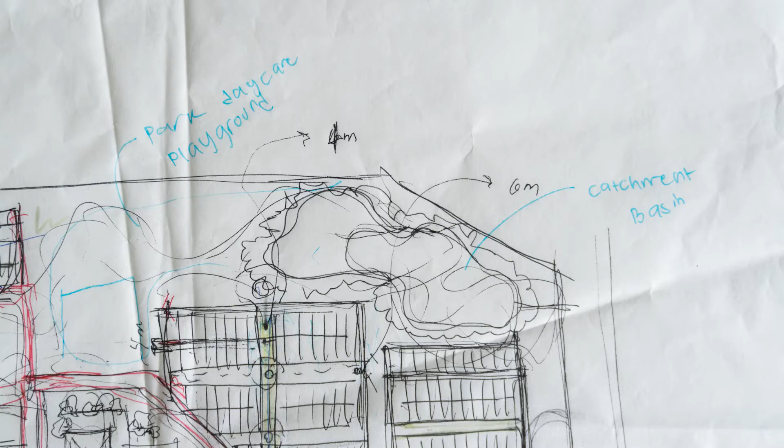Hi guys, I'm Alexa and right now we're about to start a meeting with the Vice Mayor of Siargao, Vice Mayor J.R. Coro, and his team for us to present what Anne and Wendell have actually produced for the relocation sites in Siargao Island.

Hi Vice Mayor! Hello, good morning. Sorry for being late. No worries, no problem. Yeah, we were corrected also - it should not be relocation, should be resettlement. You cannot force people to move, it has to be voluntary. We'll be very conscious of the word relocation and we'll make it resettlement.

Out of curiosity, Vice Mayor, where are the families right now? They're in coastal areas mostly, and the DENR placed structures that mention no-build zones based on standards of the E-NIPAS Act of 2018. So right now they're all temporarily located in various areas. There might be changes in the land size, madam, because they're conducting a biodiversity assessment.

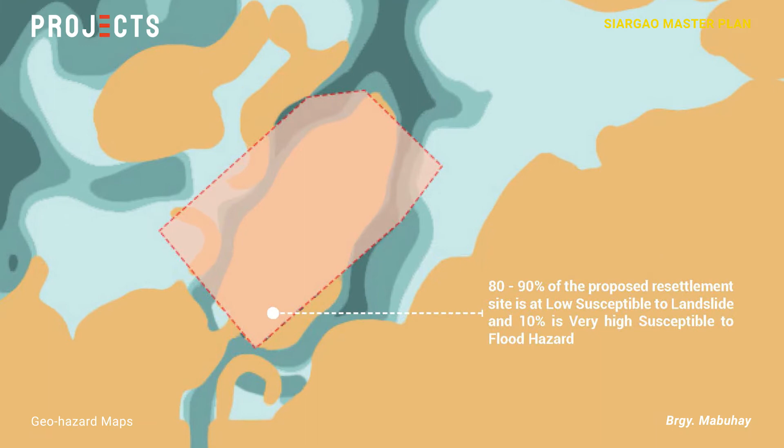We wanted to cluster different groups of families together so that they also have access to amenities at equal distances. We didn't want someone to be too far to a certain amenity, which is why the multi-purpose hall is central to everybody. Then we allotted open spaces and general landscapes all throughout.

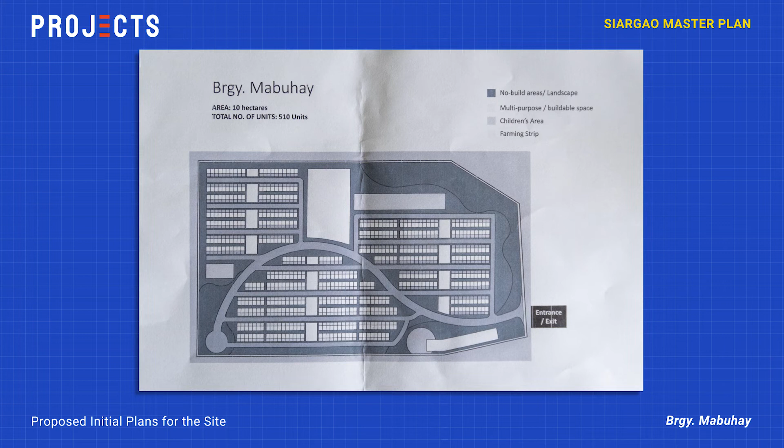And then we noticed there's a 2-meter easement on each back end of each lot. So instead, these families can actually share these as shared garden spaces for gardening, for farming, so that it will also help them with their food.

And so we have one major road, which is 10 meters wide, and we made sure to minimize it so that we could just focus on open spaces. Really well-designed open spaces and amenities and children's designated zones for children is something we really gave importance to, so that they could also enjoy living or engaging in their own personal activities and lifestyles.

So the window design is heavily inspired by the culture and lifestyle of Siargao, and the window design wants to represent what Siargao is - having the perfect wave, having a teardrop-shaped island, being known as the surfing capital of the Philippines, and being abundant in coconut trees.

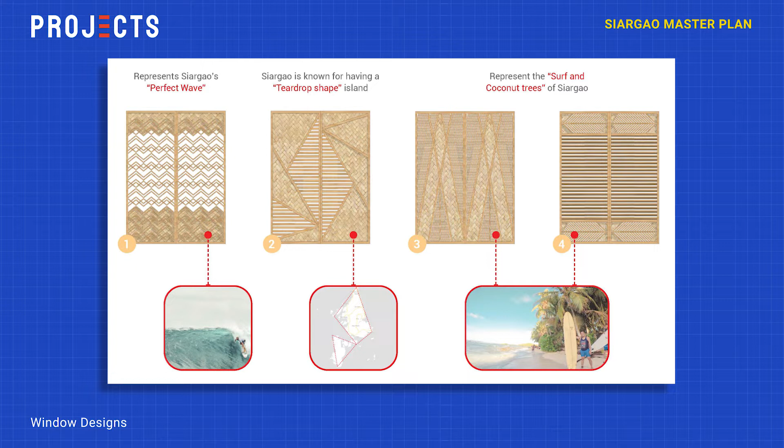For the designs, only one will be chosen by the user. Actually, I know speed is also an issue, so we tried to make it look as beautiful as we can for everybody. But if you do want a plain design, that's also okay. If you do want to pick any of the designs, we will make plans for these so that it could be easily replicated or done on site.

Maybe in the future when there's more time and budget, they can engage in rainwater catchment. You can incorporate that because that's really a must - one of the things we normally do. Like for example, in the island communities we have, prior to the typhoon, everybody had its own rain catchment.

Secondly, under the building code of protected landscapes and seascapes, you're required to have your own rain catchment. Because our water source is very scarce, and since we're type 2 weather, we have rain the whole year. That becomes your primary drinking water source. Sorry.

Okay, so we just ended our meeting with the local government of Del Carmen, Siargao. Anne and Wendell presented their plans and ideas for the resettlement sites, and I think it was well received because the mayor and the vice mayor seem to have liked it and are looking forward to building the first prototype house.

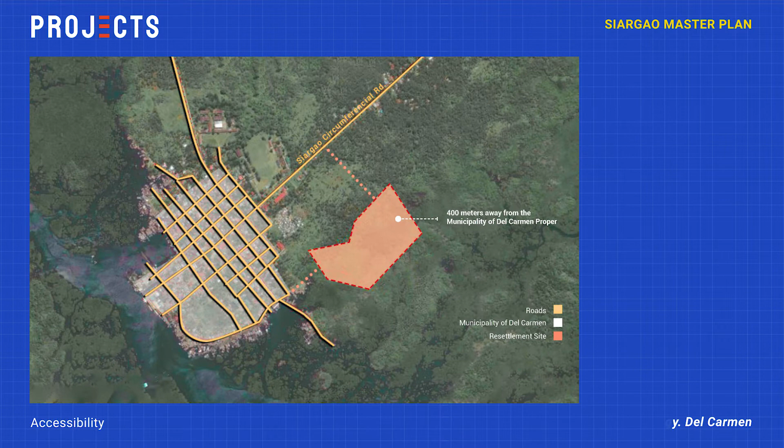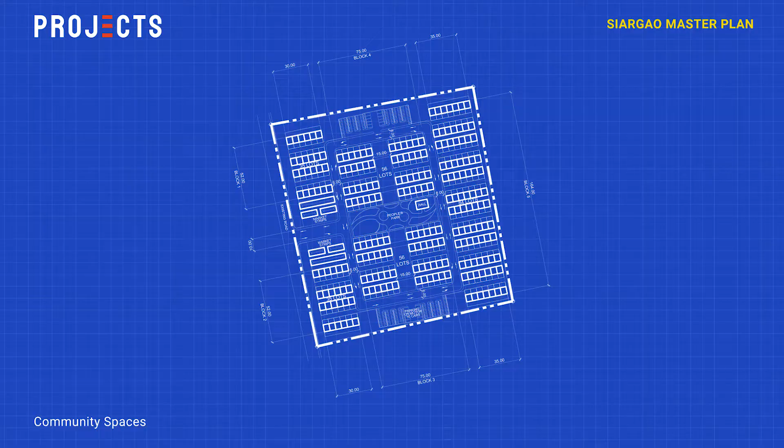For the second site, Del Carmen, it's near the poblacion area, so I considered extending the grid of the poblacion area towards the resettlement site. One of my urban planning inspirations is Barcelona, where every 9 blocks there's an empty block that serves as open space. I also put a big open space for a community open space in Bitoon.

It's quite tricky because it's near the borders of 2 municipalities, but the potential for this site is huge since it's near the airport and the seaport. So initially I created 2 access points, one leading to Del Carmen and one leading to the municipality in the south. What I considered there is accessibility first, then the number of houses based on BP 220, then open spaces for everyone.

Jumping off from what Anne and Wendell showed us earlier, we'll start with the one they made for Barangay Mabuhay. We had Will check this, and he pointed out some key flaws to the plan.

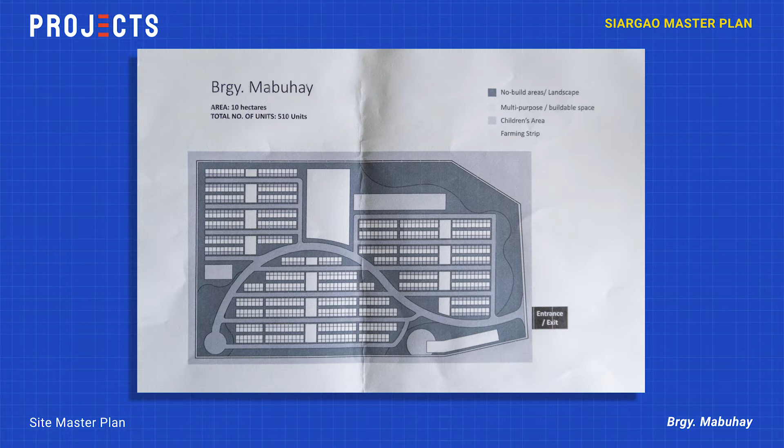One of the flaws was, why did you make it a curvilinear road? Tapos sabi niya pa, it's curvilinear pero hindi pa siya organic. So that was one of the things we improved on when the master plan was turned over to us.

So this is what he sketched. You can see the transformation from this to this, to a more livable space. Pero we can see na the reason why it was first layouted like this is because we wanted to make it more efficient—we can fit in as many houses as we can in one site.

Pero the site is also tricky kasi sa perimeter, it's very flood prone according to the flood hazard map, but the site itself isn't. Dito sa gitna, the middle part is well above the flood level. That's why the greens are all sprawled over the perimeter.

The reason for why the road is like this is to connect from point A to point B—there would be a connecting road here and then also here. What stood out sa plan na to was that it's mainly dominated by road networks, which doesn't really portray what Filipino life is.

What does Filipino families have in their communities? They like to gather in places, play basketball, do Zumba. It's very community heavy. Yun nga.

Sabi ni Will, why is it parang kalat—your green spaces are kalat. That's why he outlined the green spaces first. The way I see it, it's like he was outlining the void, which is the green space, so that it also brings out the community spaces.

So from the main road where the vehicular access is, yung mga kotse, the cars would only be limited to this main spine. Yung transition niya to the homes is that there would be...

6-meter wide roads in case they wanted motorcycles, and then from there the pathway narrows down to footpaths na that would directly access the homes. So you have a hierarchy of different access—the major road for cars, then 6 meters for smaller vehicles and people, and then 4-meter sparse footpaths.

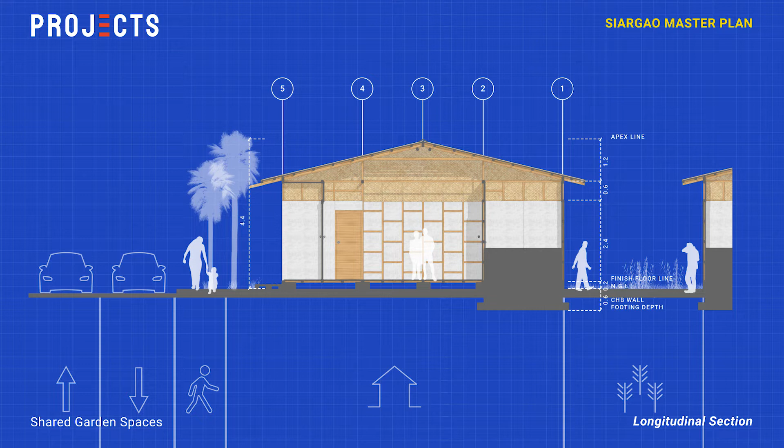We also designed it so that in designing houses, there needs to be rear setbacks. Para hindi sayang yung rear setbacks, we also made them shared gardens for each house, so there's really an abundance of greenery in this place. If we have shared gardens, we're also encouraging our homeowners to have farming as another way of life here.

Kasi they're relocating from the sea to this one, which is located in timberland, yung maraming puno na—so it's a really different lifestyle then. There would be a catchment basin here because this is the deepest part of the site, and it will flow down there.

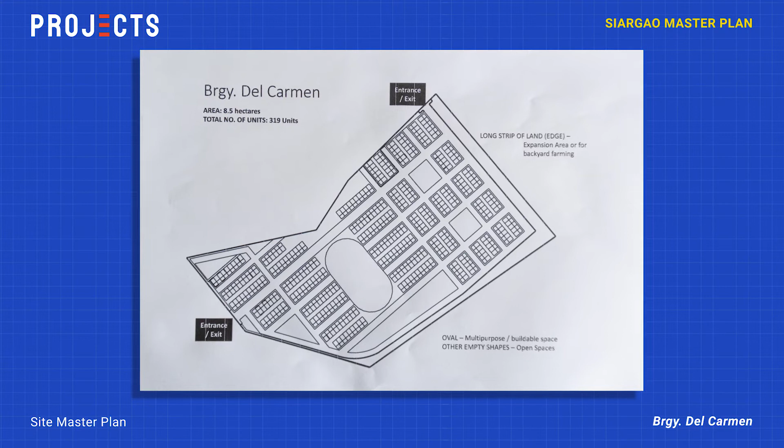Sabi ni Will na we do the other sites naman, so another one is Barangay Del Carmen. This is how it started out—also maximizing efficiency first. We're just adding the green spaces to where the central spine is din.

Kung saan dadaan yung kotse. When you enter the subdivision, ang una mo makikita is yung green open spaces where the people gather.

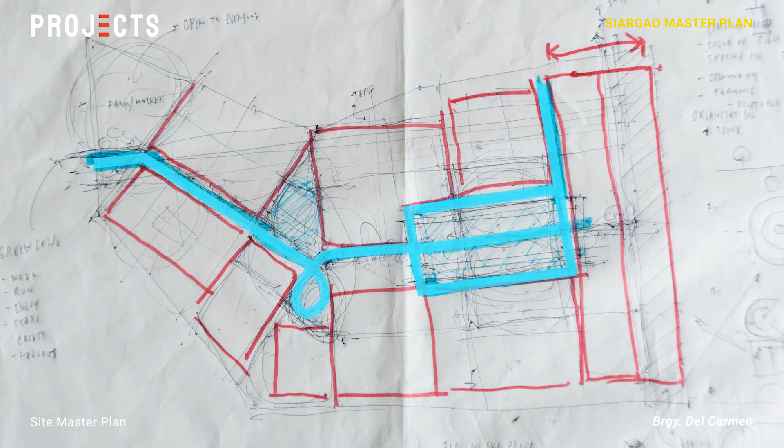It's basically the same, so parang in-offset lang namin from the shape and outline of the site. From there, there is also an equal access from each block.

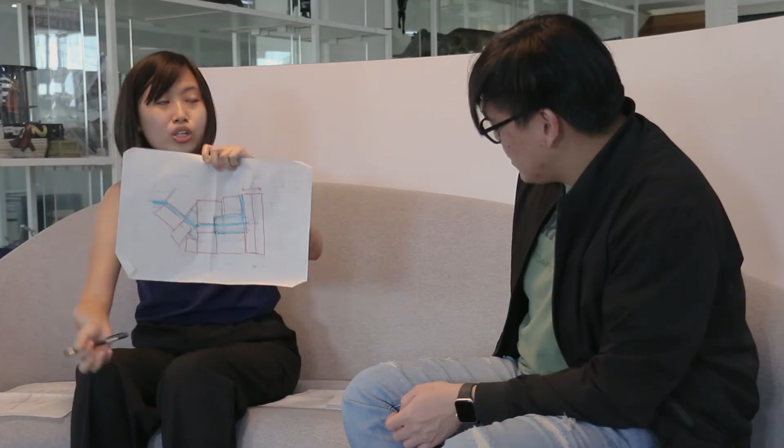Tapos medyo awkward din kasi tong site na to, so you could see that—yeah, there's a tail. And then there are awkward triangular shapes, which also opened up opportunities to create green spaces pa. You have these like random things here, I guess.

But I think it's a common theme, not just with housing, especially when we're doing office spaces or condominiums. We always try to study the feasibility first, see how much we can fit, and then try to be the most efficient we can, and then start chipping away and playing with the masses.

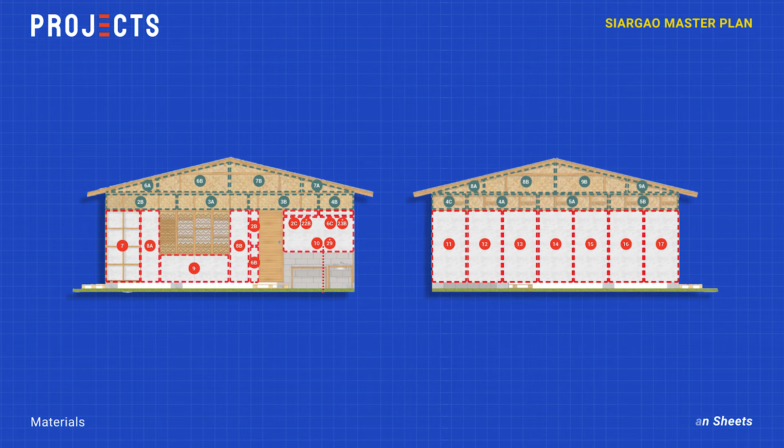The materials we thought of using are fiber cement board and amakan sheet. So a combination of those and a little bit of CHB wall for the areas that needed extra protection.

The fiber cement board is one of the materials that are suited because it's cost effective and it provides enough protection against environmental hazards. And then the amakan sheet allows passive ventilation.

Is this amakan sheet local? We got inspired by the traditional bahay kubo. With regards to the supplier, I'm not sure if there's a supplier for amakan sheets in Siargao.

But I heard that when there are times you can't find materials in Siargao, then you have to get it from neighboring cities.

So there you go. What about the architecture-wise, like without the materials and all this? How did you draw the line from the materials, the requirements, and what did you come up with basically?

The form of the house is very modular. So we started off with the structural system allowing the standard size of materials such as 1.2 by 2.4, which is the size of plywood, as well as the amakan sheet, same thing. We did that because we need to use the materials as efficiently as possible. So less cutting, less work.

It's interesting, because when you're doing bigger projects, materials don't affect your form and plans as much, right? What's a 2x4 to a 1,000 square meter plan? But I guess it's unique in this case because those things matter, because you have to get it built as soon as possible, as easy as possible.

It's basically still post and lintel, just with cheaper, easier materials. It also allows us to protect the house because it is elevated. The need to elevate the house is to protect it from termite attacks, and also it provides passive ventilation.

It's kind of cool, like in Philippine architecture we always try to go back to the bahay kubo and all these things, just because people are used to it. But it's cool that you're doing this project without the thought of trying to look like a bahay kubo, but because you need to apply all those principles, like ventilation and protecting from the ground.

So it's like you're doing Filipino and tropical architecture not on purpose, but out of necessity. I think it's kind of cool that we always have to go back to the basic principles. It's a good peek at how we do things, a smaller version of our process for bigger projects essentially.

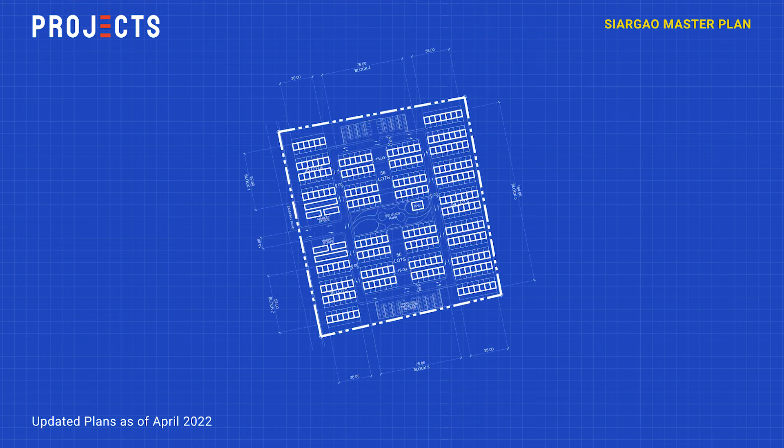The design is also directed by sustainability. It gives us a design that saves money, saves time, and saves manpower at the same time. One important thing, especially with this project, is that these houses aren't fancy just to be fancy, or flashy just to be flashy.

It's because in this scenario, we can't afford to look past the necessities, which is a living space for people, especially during the calamity and all that.

And the project is also like an elevated bahay kubo. So even if the budget is very limited, we didn't compromise the aesthetic aspect of the building.

I think it's not about making the buildings look nice for the sake of being nice. I think good design is also dignifying to the people that live there. Of course, we try to do what we can with what we have, and I think that's a good example.